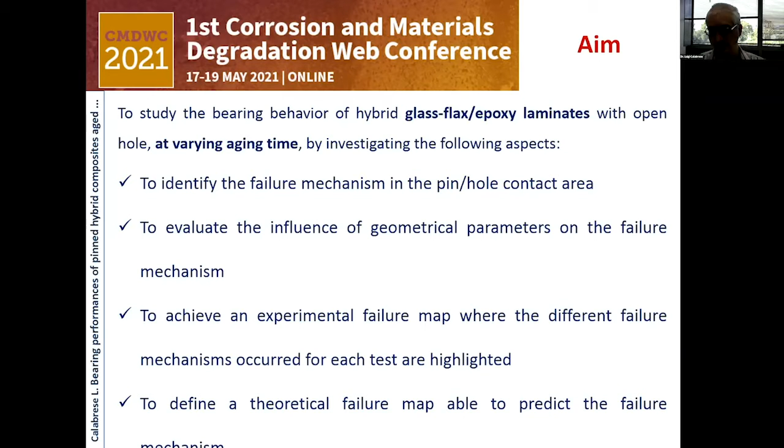Why this idea? We know that composite joints are characterized by different failure mechanisms: a net tension fracture when cracks start and propagate orthogonally to the load direction; a shear-out fracture when we have a fracture of the joint near the edge of the samples; a hybrid fracture, like cleavage, that involves net tension and shear-out mechanisms; and the usual bearing fracture where we have the collapse of the composite material just behind the pinned joint. For all of these, the failure mechanism is influenced by the geometry of the samples.

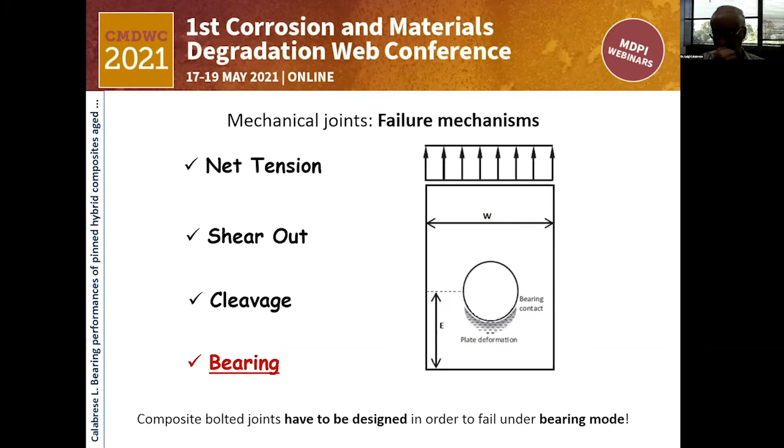For the joint design, an important parameter is to reach the bearing mode, which is the non-catastrophic failure mechanism. In the meanwhile, a new direction in composite materials is to use natural fibers to obtain sustainable composites.

From this point of view, the research literature is really structured, with a large amount of papers using several types of natural fibers. Here is reported, as reference, a short summary.

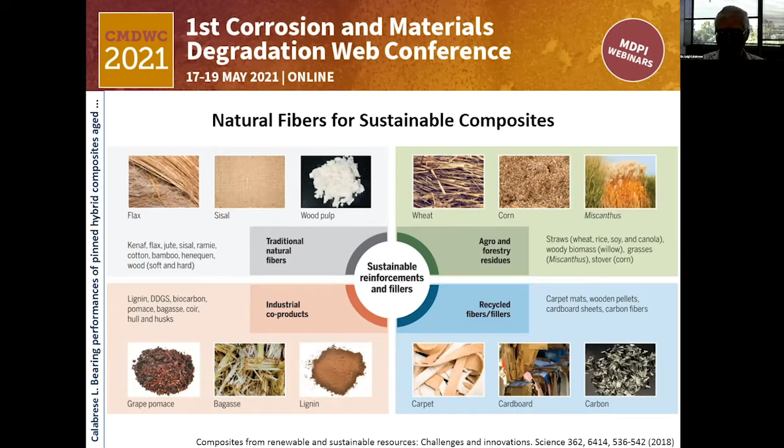But the main question is whether natural fibers can be considered suitable or sustainable as reinforcement. From the price point of view and the weight point of view, we clearly have some advantage to use them, with an evident reduction in price and weight. But at the same time, we know we have a reduction in performance, and also some issues related to the fact that the performance of the fibers is also influenced by the site where the plant grows.

The second aspect is durability — natural fibers suffer under critical environmental conditions. An important point of discussion is to evaluate the stability of these composites over time in this environment.

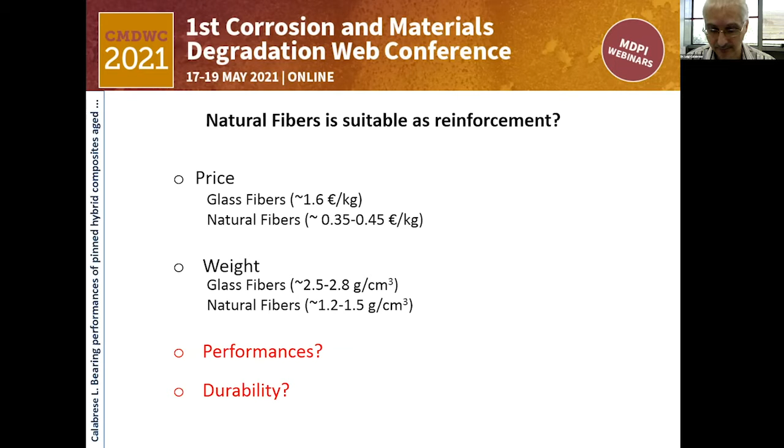Based on this concept, what is our approach? Our approach is to start by investigating a pinned joint, a classical joint. We realized different composites with varying stacking sequence — in particular, in this experience, flax, glass, and hybrid glass-flax composites.

We performed the test according to standard D5961. For the experimental campaign, we changed the diameter of the hole and also its position in the sample, to change the ratio of W and E to D, the width of the sample.

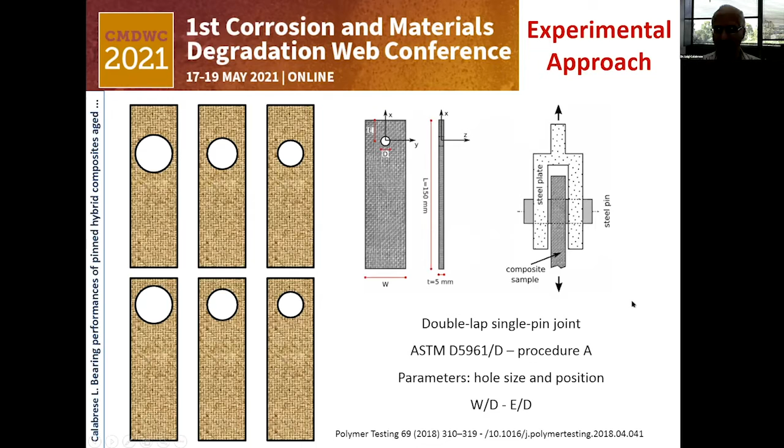The same experimental campaign was performed at increasing aging times, up to 60 days in a salt fog chamber.

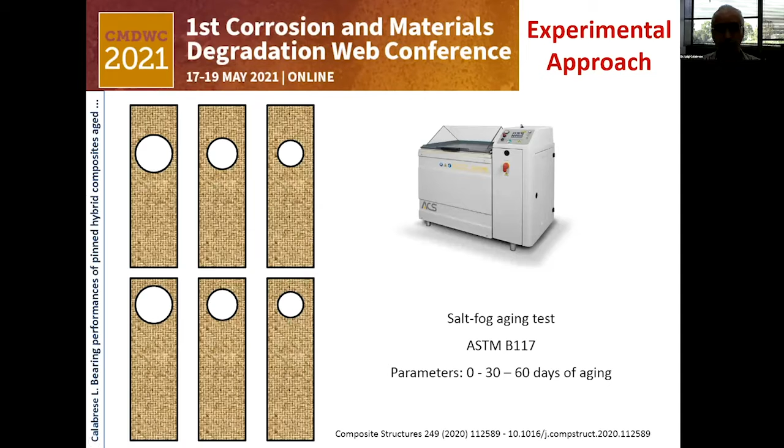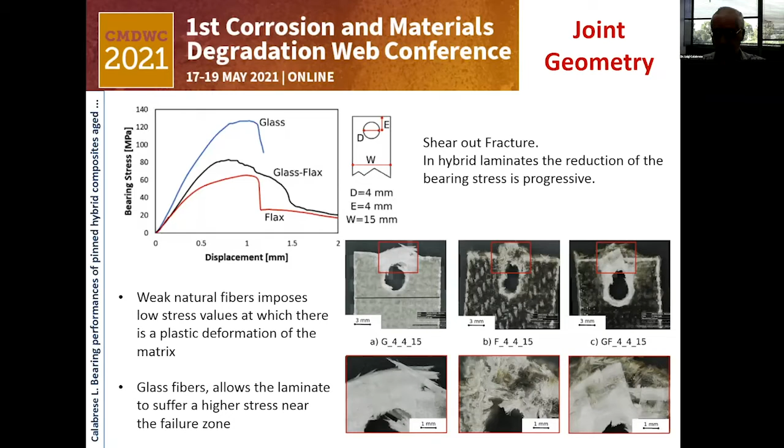In this case, considering that the edge distance is very low, the main failure mechanism is shear-out fracture, therefore a premature fracture. We see that the stacking sequence has a large influence on the mechanical behavior of the joint, because there is a competition between weak natural fibers and stiff, strong glass fibers, the synthetic one, with the hybrid composite showing intermediate behavior with a non-catastrophic fracture compared to the two previous ones.

Now, considering large edge distance but also large diameter, we have still another mechanical behavior. In this case, the net tension fracture is a premature fracture where the tensile properties of the fibers play a relevant role. In fact, the stacking sequence influences significantly the maximum stress, with obviously higher behavior for glass, and intermediate performance with the glass-flax.

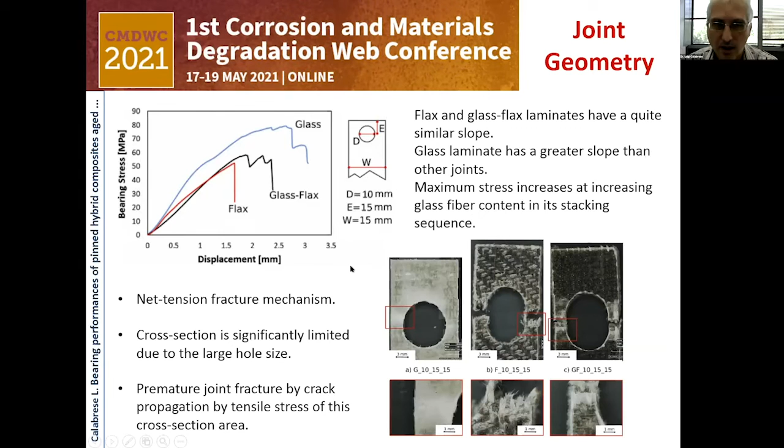Now, at this point, it was proposed an approach to identify how the joint geometry influences the failure mechanism. Here I summarized some results where we see that changing the edge distance and the diameters of the hole, we have different failure mechanisms. It's important to see that the net tension fracture was observed mainly for hybrid or natural flax composite laminates. The reason is that for this type of fracture, the stacking sequence has a relevant role in the mechanical performance of the joint.

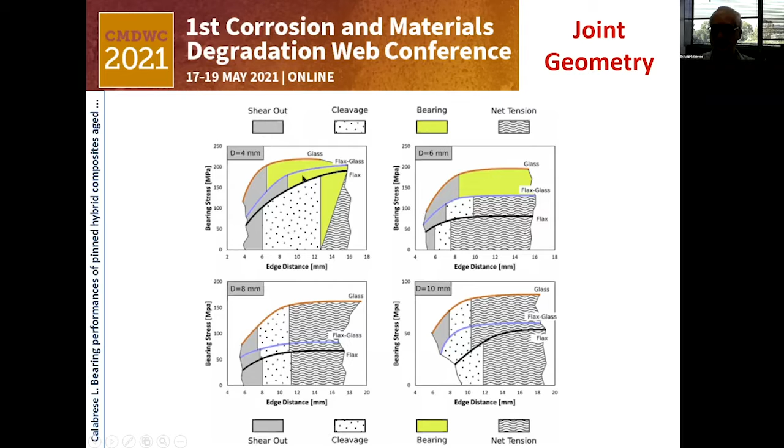In the meanwhile, also in shear out and cleavage fracture, we have a relationship between stacking sequence of the composites and performance. But after that, we also addressed another aspect, because previously we evidenced how the failure mechanism and the mechanical performance change at varying joint geometry. In this image, where we related the ratios WD and ED, we indicated the different failure mechanisms that we observed in the map. These samples were all realized in an unaged condition, and we see that depending on the joint geometry, the failure mechanisms are clustered in groups.

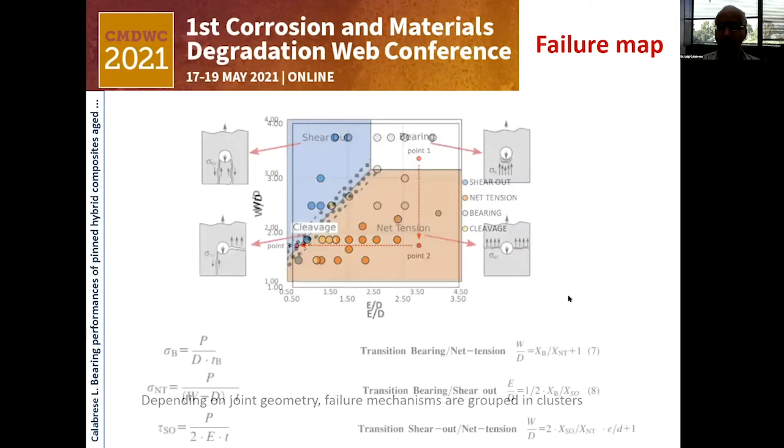At this point, our idea is to propose a simplified model that discriminates these clusters. Our approach is based on the typical simplified formula for bearing stress, net tension stress, and shear out stress. Considering that a mechanism for bearing occurs when the load observed in this formula is lower than the other, we identify the transition between, for example, bearing and net tension, considering that when the load in bearing equals the load in net tension, this can be considered as a threshold value that discriminates a bearing to net tension fracture.

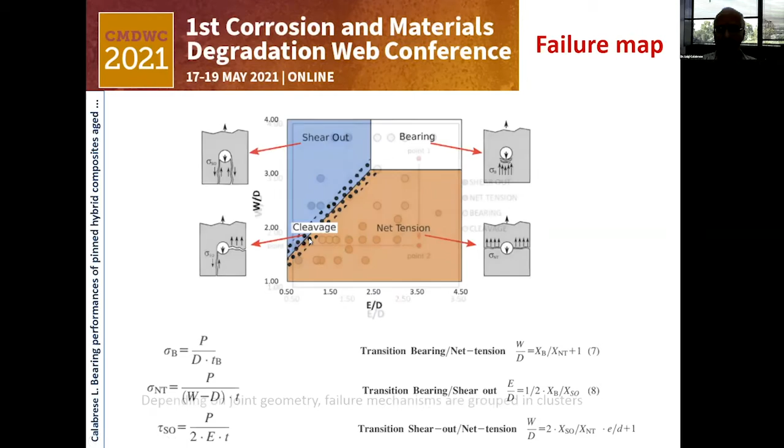We obtained these three formulas, and we see that this one is a horizontal line in this plot. The bearing to shear out instead is a vertical line, and the transition from shear out to net tension is an inclined straight line, with a slope reported here, in agreement with the experimental evidence that we show.

Here we summarized the failure maps that we observed experimentally for the different configurations. The flax composite is characterized by the smaller area for bearing. Instead, for glass, we have the larger area for bearing, therefore it's the most stable configuration. By using this map, it's possible to identify the bearing fracture for the glass-flax laminate for two specific values of ED and WD ratios.

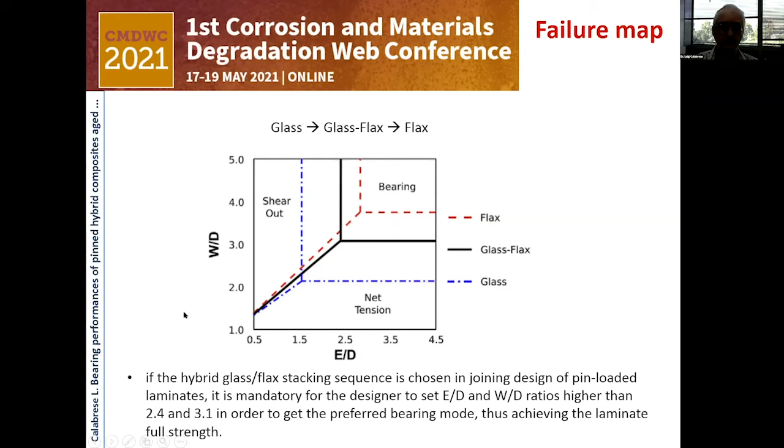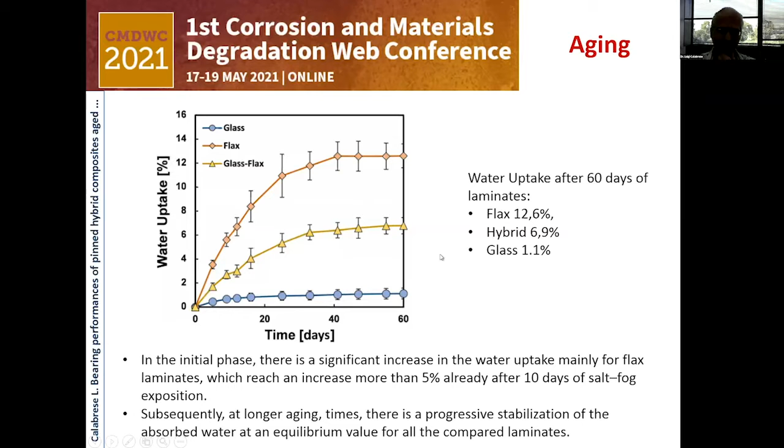From the mechanical point of view, we see that effectively we have a progressive reduction of the mechanical performance, the maximum stress decreases due to the aging, but also coupled to this reduction we have a transition, for example, from bearing mechanism to a mixed bearing net tension fracture. And also the displacement increases, indicating that we have a progressive softening behavior that increases the flexibility or plasticity of the composite.

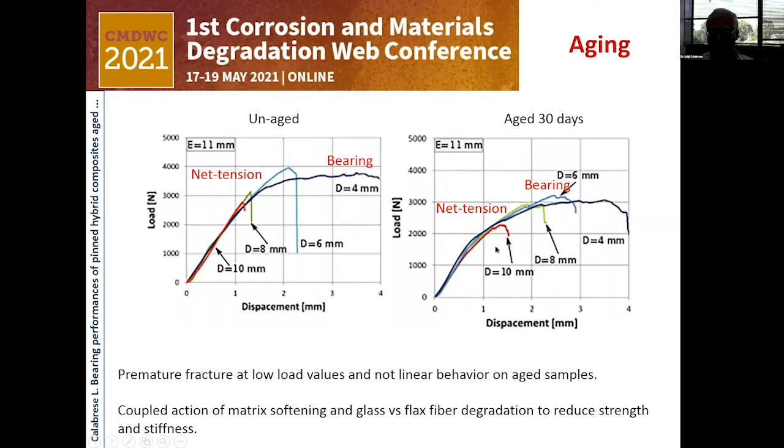This behavior was observed roughly changing the joint geometry. In this case, I won't go into detail to reduce the presentation. This is a new map where we tried to summarize how the aging effect influences the mechanical performance, the failure maps, and the failure mechanisms. We compared the maximum load and the displacement at the maximum load in order to understand how much the curve shifted from the left to the right side of this plot.

At the same time, we indicate this one, the unaged sample, and this one as the samples progressively aged at 30 and 60 days in the salt fog chamber. We see that the marker increases in dimension, increasing the geometry related to the edge, the distance of the geometry. Now we have that...

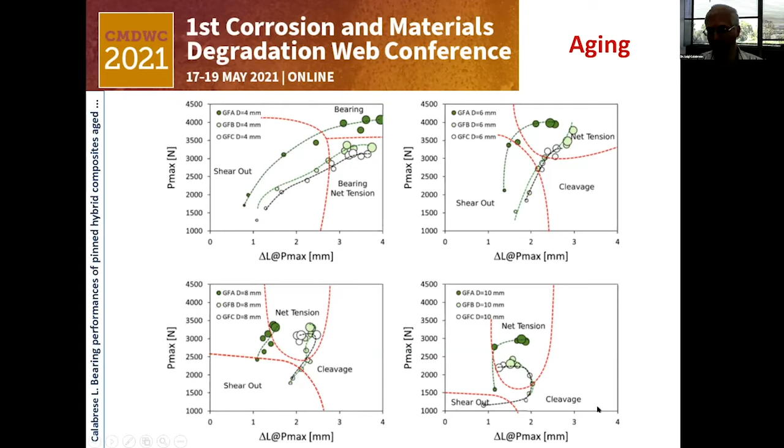And instead, for large diameter, the premature fracture due to net tension switches the behavior of the composite, like in the bearing configuration, with mainly a reduction of the load, but without a significant shift toward higher displacement.

Then we should talk about the behavior, but at this point, also due to aging, we observe this typical trend. But at this point, we tried to identify the failure mechanism and to relate this failure mechanism to the aging. What is the approach that we used?

In particular, we started from our typical formula. These are the same formulas that I showed before, but now they are explicitated to the load. We see that the maximum load, our hypothesis, is observed when we have the minimum from one of these formulas.

But at the same time, we also added the cleavage contribution shown here, that previously I did not indicate. In particular, I considered the cleavage fracture as a mixed contribution of net tension and shear out. Therefore, I determined the average value, and then I considered a coupling index that experimentally was evidenced as 0.83.

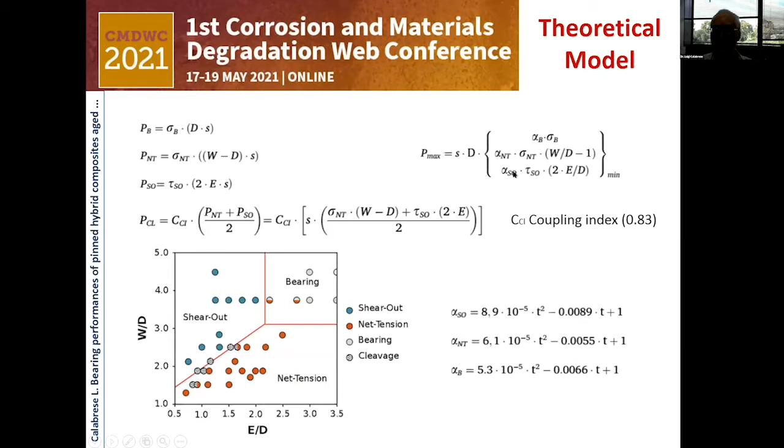At this point, we identified the load at the minimum to observe the failure mechanism, and we were able to determine the line that identifies not only the failure mechanism, but also the maximum load.

This compares the experimental data, the markers reported here, with the theoretical one, the dotted line. Effectively, we see a good relationship between the two models on the load, but mainly also in the failure mechanisms, with an error in the range of 5 to 8%.

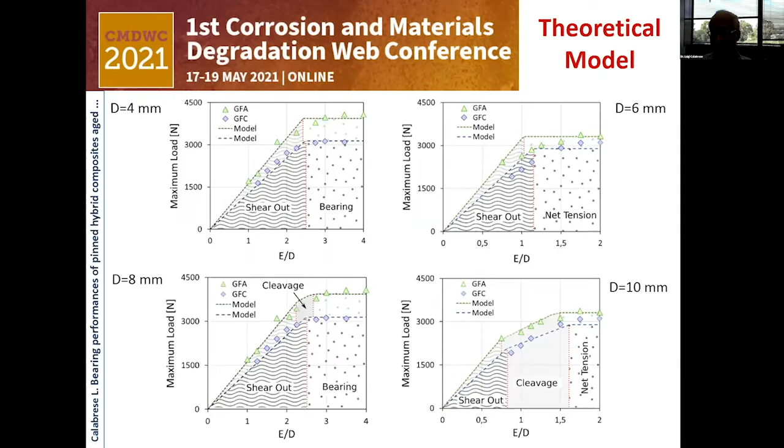Here I show the failure map in 3D of aged samples after 60 days, with the markers being the experimental data, and this being the model obtained by using this formula.

And therefore, we validated that the system is suitable to discriminate the failure mechanisms and the maximum load of the joint at varying joint geometry.

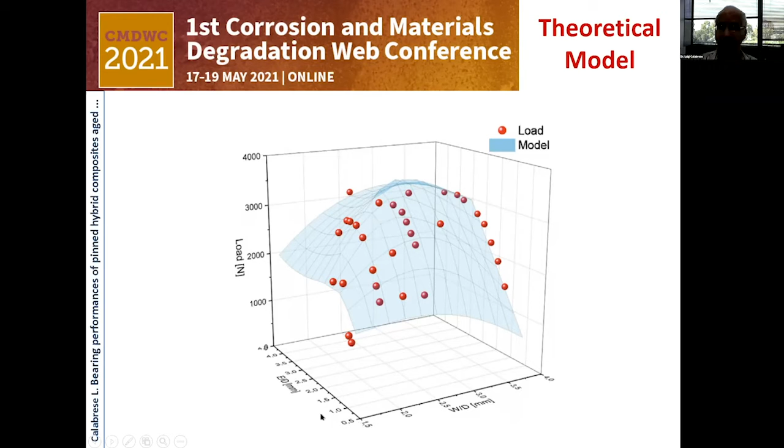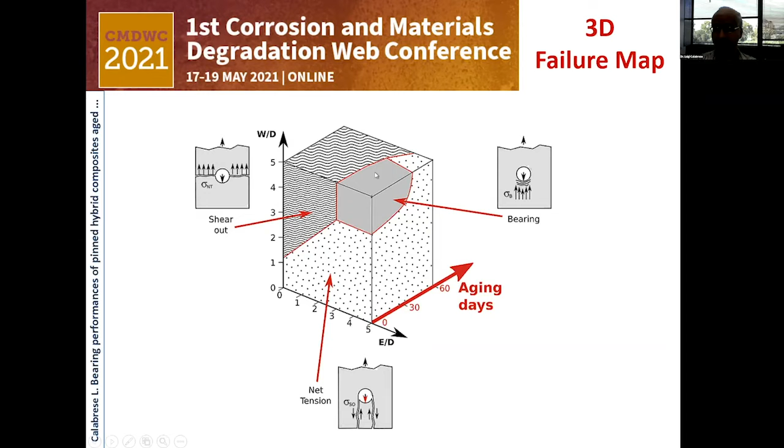The last step of this activity is an idea that by performing tests at increasing aging time and considering in which way the failure mechanism changes, it is possible to realize a three-dimensional failure map that can be used to identify where a specific failure mechanism is stable, for example the progressive bearing one.

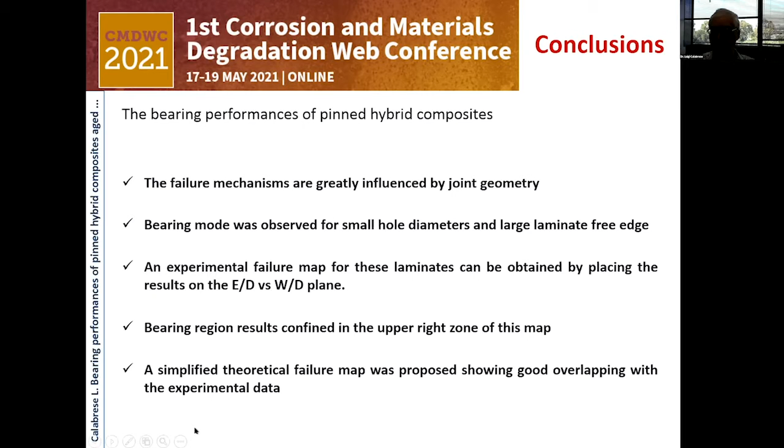At this point, summarizing, we can divide the conclusion into two sections. A first section related to the unaged configuration, where it's possible to evidence that this approach can be used to evaluate in which way the sample geometry, in particular in this experience the E/D, the edge distance to diameter, and the width to hole diameter ratio, influence the failure mechanism, and also to propose a simplified approach to forecast this failure mechanism, supporting the joint designer to identify the threshold value of the joint geometry to obtain progressive fracture of the joint.

In the meanwhile, the ageing contribution plays a relevant role in the degradation of the joint, and this degradation influences the complex failure mechanism that occurs in the pinned samples. In this case, the theoretical approach that we applied required the addition of an additional parameter related to the degradation index, which required support from experimental data.

But anyway, adapting this approach to the ageing information, it is possible to have a theoretical model with reliable performance.

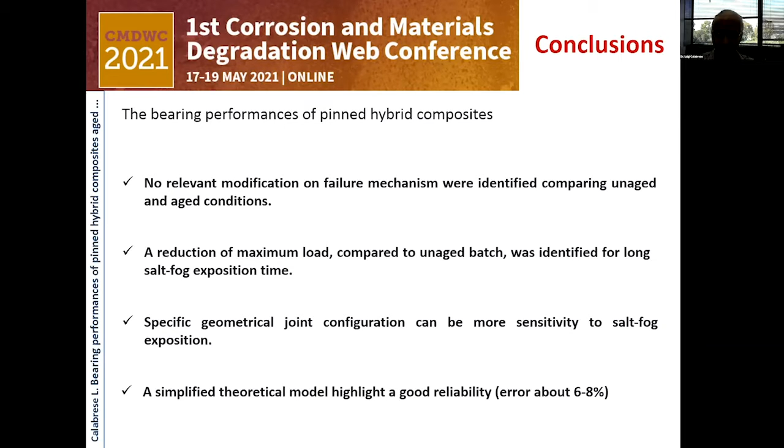Luigi, because you are the chair of the stream, let me take the lead. If there are no questions, I have one, Luigi. It's a corrosion conference, so is there any environmental effect in the story that you presented?

Now, of course, the degradation aspect of the composite material is a critical point. This is part of our activity that we are working on in Messina together with other partners. Our feeling is that specifically for composite materials, the degradation of the constituents, matrix and fibers, is the critical point, and in which way this failure mechanism occurs. And this is one aspect.

In the literature, we saw something about using coupling agents to reduce the diffusion of water at the interface. And this is our idea.

But at the moment, we are thinking that the degradation mechanism should be split into two groups: reversible and not reversible. Our idea is to give a further improvement on this approach, trying to discriminate how much of this degradation mechanism is critical effectively for our composite material. Because, for example, if we age one sample only for one day, we absorb water easily for a flax laminate, but it's reversible because it's only superficial water.

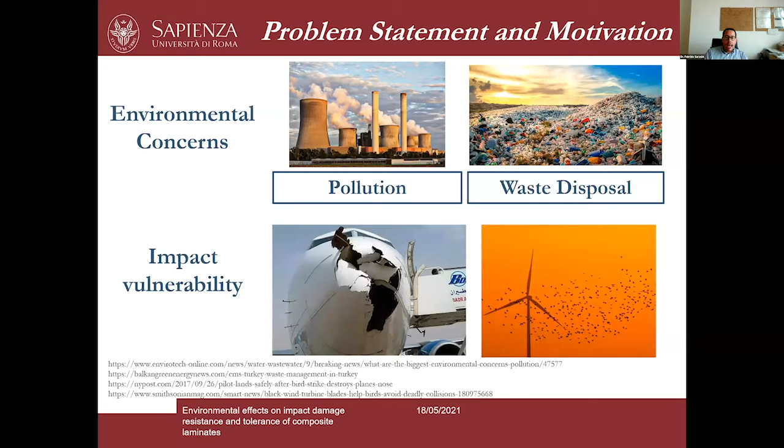Impact, if we want to give a formal definition, can be defined as the relatively sudden application of an impulsive force to a limited volume of material. The problem with this definition is that these two words, relatively and limited, can be subject to a wide range of interpretations. But in this presentation, I will be referring to low velocity impacts as those impacts which occur with a speed lower than 10 meters per second.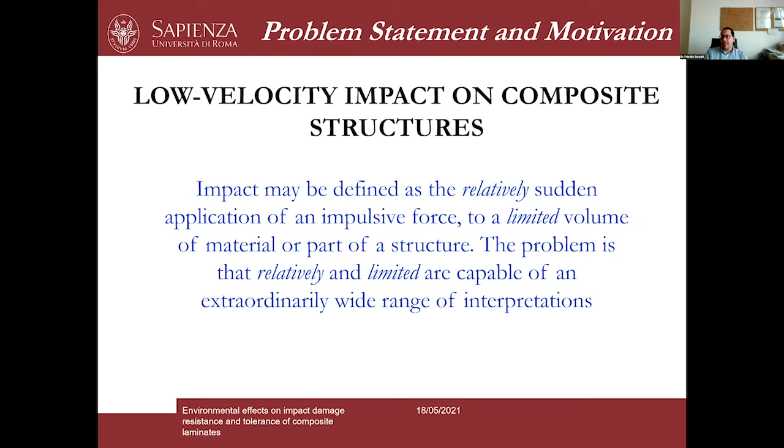So the next step is to understand why a low velocity impact can be a serious threat to composite materials. First, because these kinds of events can occur in the everyday life of a composite material, during manufacturing, during maintenance, during operation. The biggest difference compared to metal structures is that metal structures can usually absorb a large amount of energy by plastic deformation, but when we deal with composite materials, there is no plastic deformation, or at least it is very, very limited compared to metals.

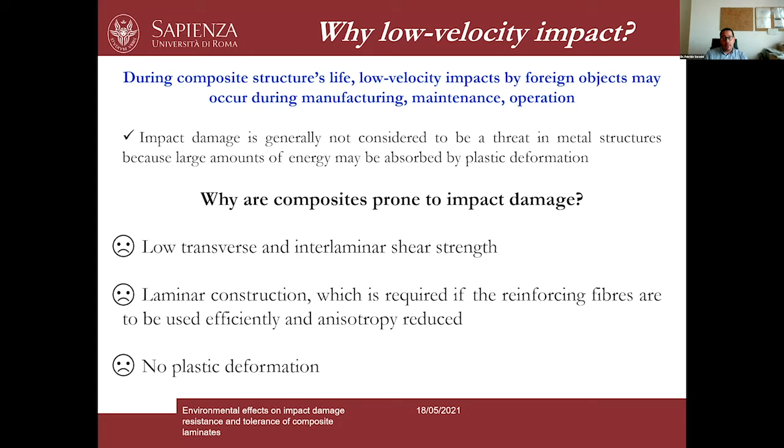In addition to this, composite materials usually show a pretty low transverse and interlaminar shear strength, and another problem is related to their laminar construction. If we put together all these issues, we can easily understand why composites are so prone to impact damage.

The brittle nature, the brittle failure mechanism of a composite material, together with its heterogeneous and non-isotropic nature, give rise to four major modes of failure under an impact event: matrix mode, delamination mode produced by interlaminar stresses, fiber mode, or penetration, when we get the final perforation of the specimen. These different damage modes can be operative at the same time in a composite material, so the resulting damage scenario can be pretty complex.

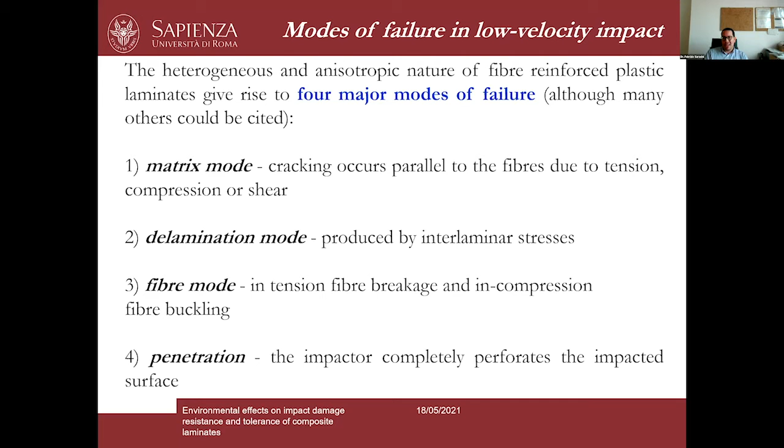Here you can see a schematic view summarizing the typical damage found in composite materials, where we have bending cracks and shear cracks, and these cracks usually trigger the nucleation and development of extensive delaminations. The problem with these delaminations is that they can severely reduce the strength of a composite material.

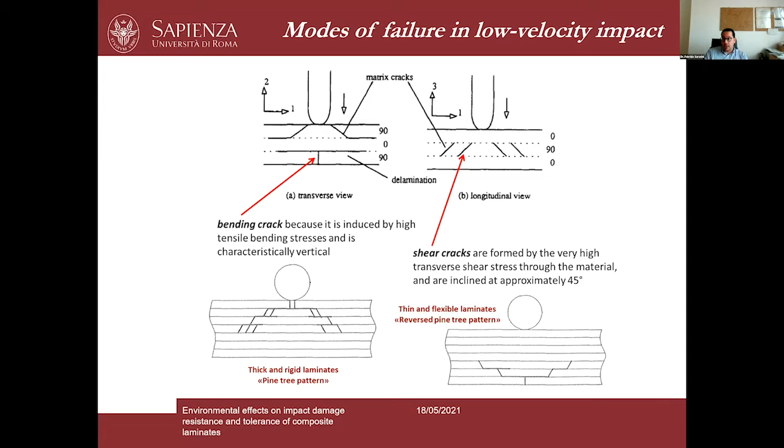But at the same time, they can go easily undetected by visual inspection, because many times they are located inside the specimen. So on the surface you cannot see anything, but instead you have significant damage inside, and the post-impact residual strength of the composite laminate is usually significantly reduced.

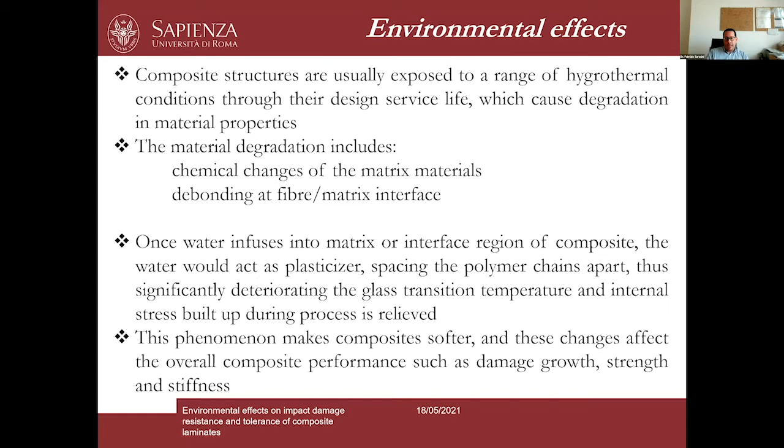In addition to the impact damage and the vulnerability of composite materials, we have to mention that these composite structures, during their service life, are usually exposed to a wide range of hygrothermal conditions. These conditions can cause chemical changes in the matrix material and can destroy the fiber-matrix interfacial adhesion. It is expected that these effects can completely change the mechanical response of composite materials, not only the quasi-static performance but also the dynamic response.

There are a lot of studies dealing with the effects of low velocity impact on composite materials, or studies dealing with environmental aging on composite materials. However, the need to correlate aging effects with the impact resistance of a composite material has received limited attention in literature, despite some existing studies.

Here, for example, you can see the typical water absorption curve of a standard conventional composite material based on carbon fibers embedded in an epoxy matrix. These composites were subjected to water absorption at 71 Celsius degrees for a pretty long time, over 400 days. Here you can see the typical water absorption curve.

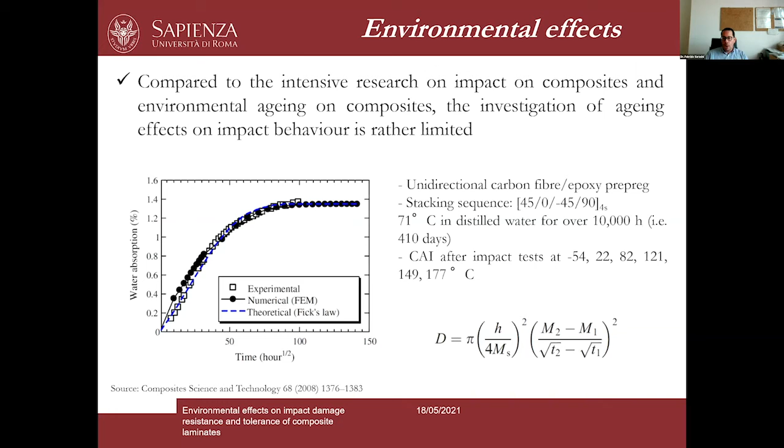We have to mention first that composites usually follow Fickian behavior under water absorption, and here you can clearly see these results. But one point to note is that for conventional synthetic composite materials, the level of absorbed water is usually pretty low, around 1.2 to 1.4 percent.

The problem is that despite this very low water absorption, here you can see the impact response curves for dry and wet specimens, and there is an effect on the impact response curves. In this specific case, the threshold load of the wet specimen was significantly reduced compared to the dry specimen.

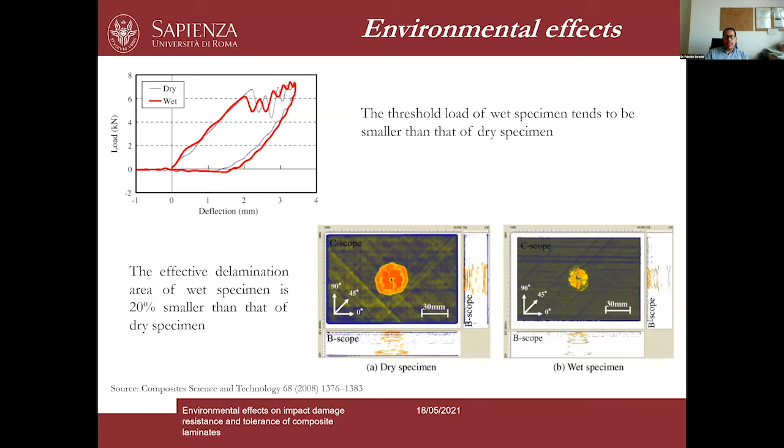A much more important issue is the extension of the delaminated area. Here you see a comparison of the delaminated area obtained by ultrasonic C-scans, and you can see that the delaminated area for the wet specimen was smaller than for the dry specimen. This is related to the fact that the composite material became much more compliant, toughened and softened by water absorption.

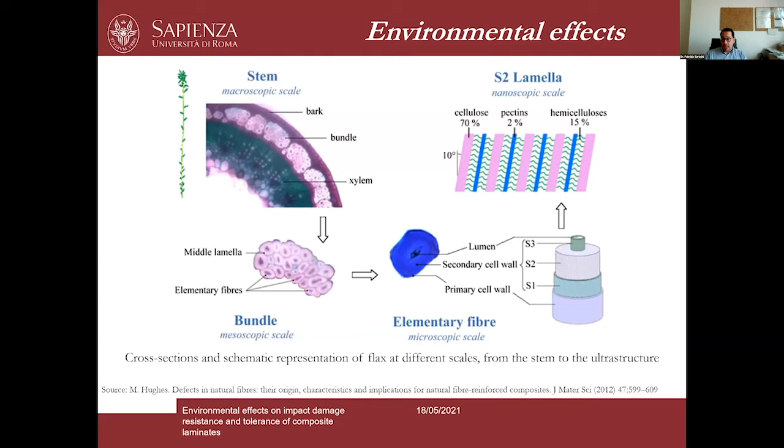Firstly, because natural fibers show some peculiarities in their microstructure and mechanical properties. Here you can see a very nice sketch of the structure of flax fibers. As you can see, these natural fibers usually show a hierarchical structure that spans from the macroscopic up to the nanoscopic scale. So we can consider a natural fiber as a composite itself. It's pretty complex, its behavior.

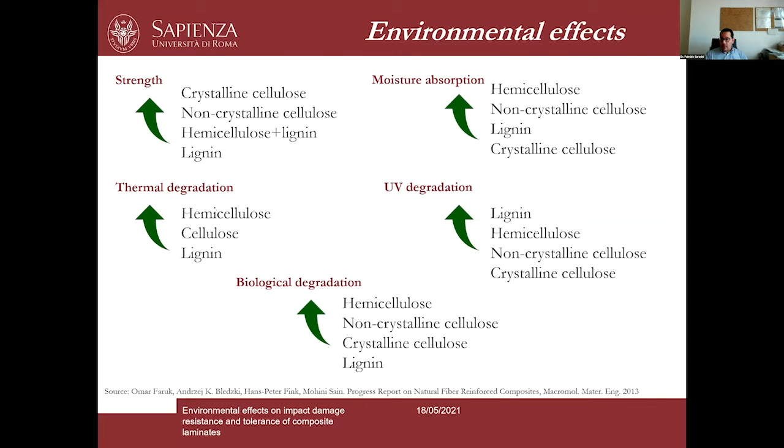In addition to this hierarchical structure, natural fibers also show properties which are highly dependent on the chemical constituents, and in particular on the relative proportion of the chemical constituents. Basically, natural fibers are composed of hemicellulose, lignin, and cellulose—the three main chemical constituents of a natural fiber. Here in this picture, you can see how these different chemical constituents can affect not only the mechanical properties, in this specific case the strength, but also the degradation properties of these fibers, in terms of moisture absorption, UV degradation, thermal degradation, and biological degradation. So this is another issue that we need to consider.

As Luigi mentioned in his presentation, there is also a very strong effect of moisture on natural fibers. This is something that is not observed with conventional fibers—carbon fibers, glass fibers, do not tend to absorb water. But this is not true for natural fibers. Natural fibers are mostly hydrophilic, and what happens is that they tend to absorb a large amount of water.

When they absorb water, they tend to undergo swelling. This swelling creates matrix microcracks around the swollen fiber, and these microcracks can actually make capillary action much easier. So we have much water which is actually attracted to the fiber itself. When this water actually reaches the fiber matrix interface, the fiber is pretty rich with constituents which can be easily solubilized by water. So we have a significant degradation of the fiber, and at the same time a significant degradation of the fiber matrix interface, which actually leads to ultimate fiber matrix debonding.

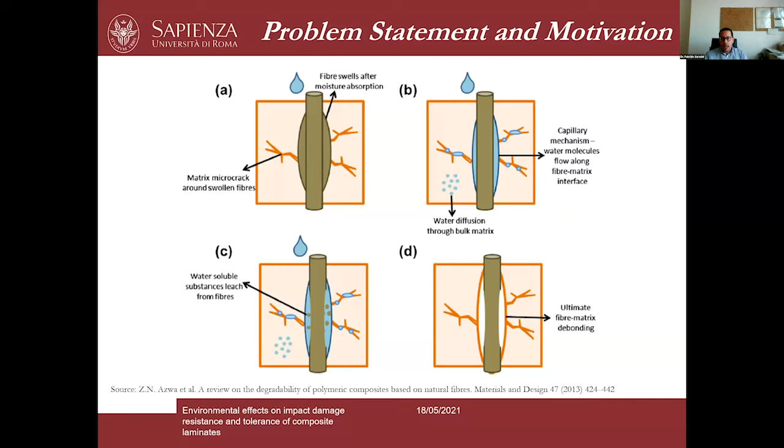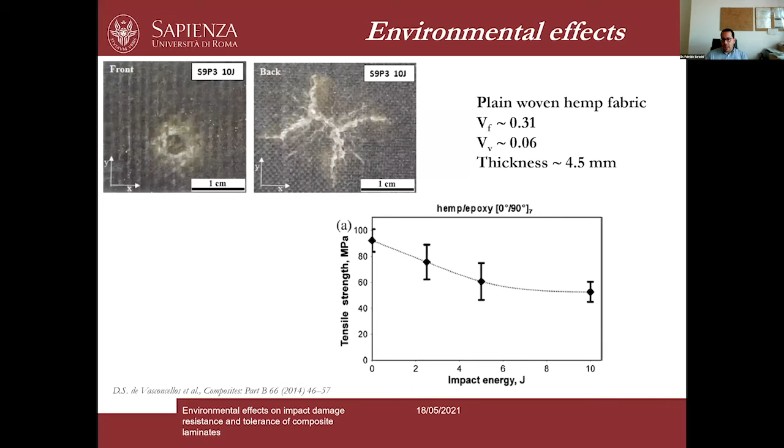So let's imagine what happens if we combine environmental aging with low velocity impact on a natural fiber composite. This is something that we have investigated. In this case, we considered jute fiber composites. In an attempt to reduce the effects of environmental aging, we tried to solve this issue by hybridization—basically hybridizing jute fibers with basalt fibers. Basalt fibers are natural fibers of mineral origin, but they show mechanical properties comparable to glass fibers, and they do not absorb a large amount of water compared to jute fibers.

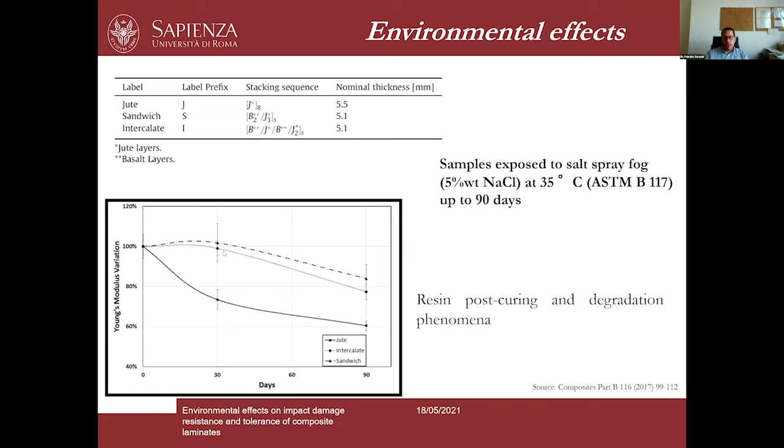These composite materials were realized in two different hybrid configurations, a sandwich configuration and an intercalated configuration—the difference being simply how we stacked the different layers together. This composite material was subjected to a salt spray fog test up to 90 days. We then analyzed the results from a quasi-static point of view, performing flexural and tensile tests, and also analyzing what happens when these composites are subjected to low velocity impact. Here you can see the effect of this aging on, for example, the Young's modulus. We can see a significant decrease for jute-based composite, and this decrease was somewhat reduced by the presence of mineral fibers such as basalt fibers.

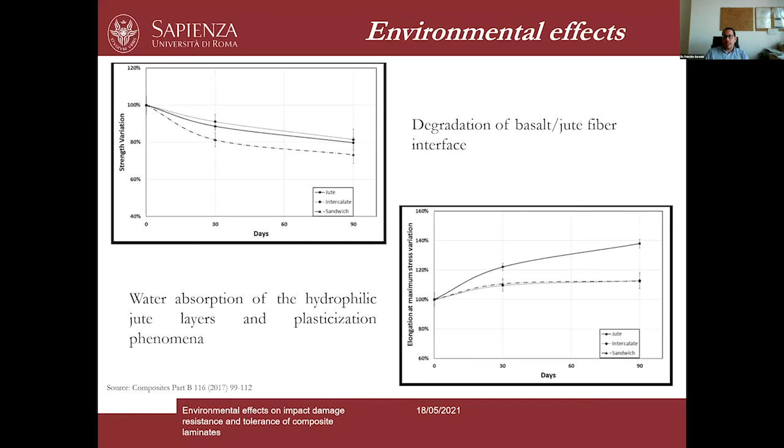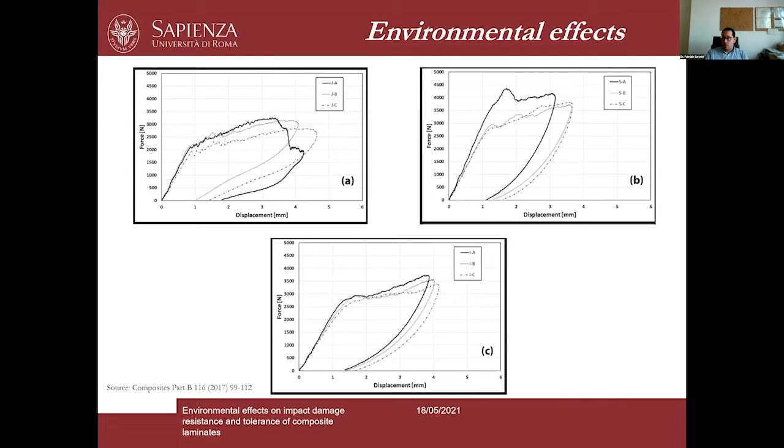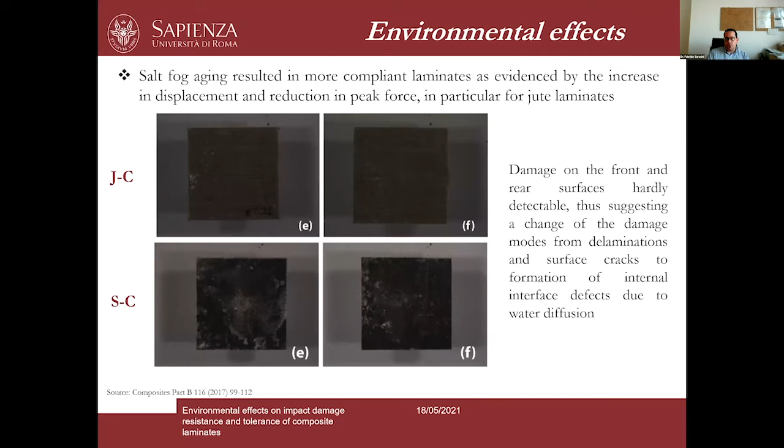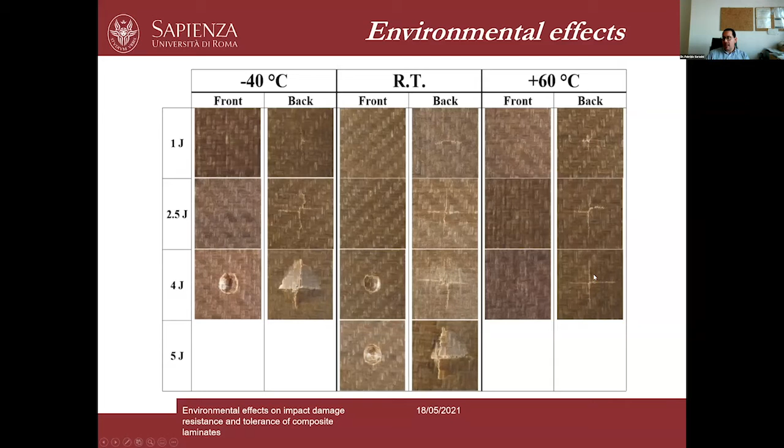There is, of course, a decrease in these properties with an increase in impact energy, and this is pretty standard. The problem is we didn't detect any clear trend with operating temperature. This is probably related to the fact, as we have seen, that these composite materials are characterized by a strong localization of the damage.

So basically, in these composite materials, the delaminations are really limited compared to standard and conventional composite materials. It is expected, due especially to this strong localization, that in the presence of the cross-shaped macro cracks, the temperature is not able to change the failure mode. That's why we didn't detect a significant effect of temperature on the residual properties. But the temperature did have a significant effect, for example, on the energy absorption ability of these composite materials.

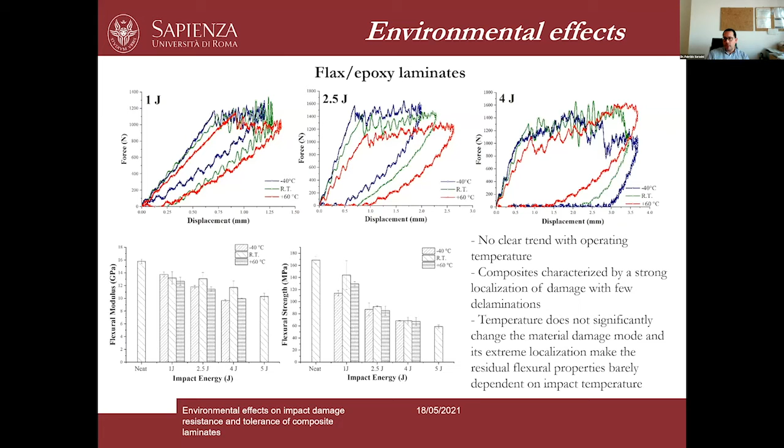These are all issues that, according to my point of view, need to be further investigated, because in literature there are few studies dealing with these issues. So to conclude, I can state that there is an increasing need for combining environmental issues and improved mechanical performances of composite laminates. This is true in different environments under different loading conditions, and impact for sure is one of the most important to address.

A viable solution to mitigate the environmental issues could be the use of natural fiber composites. But as we saw during this presentation, these composites show pretty particular behavior in terms of microstructure and mechanical properties. If we focus on the impact response of natural fiber composites, usually delamination is not envisaged as a detrimental, significant failure mode, as it happens in synthetic composite materials.

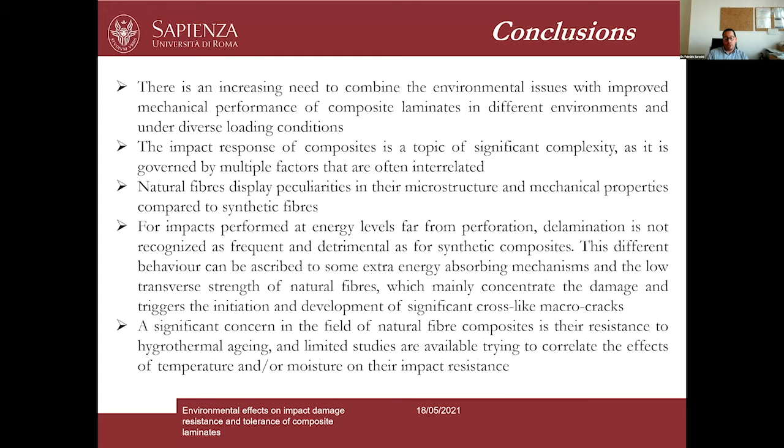This is mainly due to the fact that these natural fibers show a pretty low transverse strength that tends to localize the damage and triggers the development of significant macro cracks. So what we have to do in the future, if we want to broaden the application of these natural fiber composites, is to investigate the effect of environmental aging, in an attempt to correlate the effect of hygrothermal conditions on the impact resistance of these composite laminates. This is just to thank some colleagues and all of you for your attention.

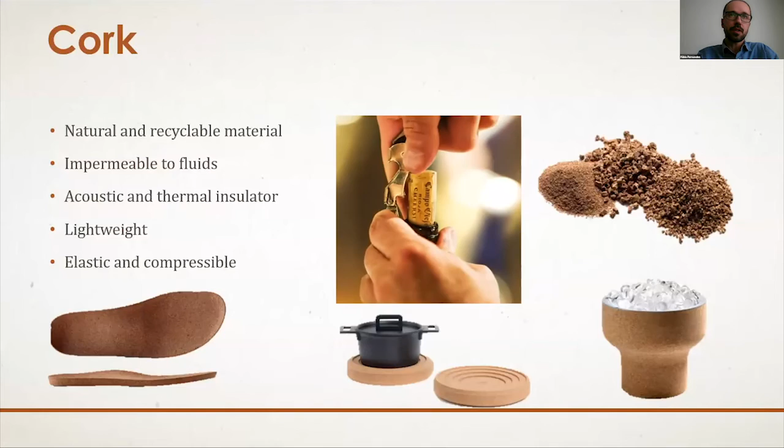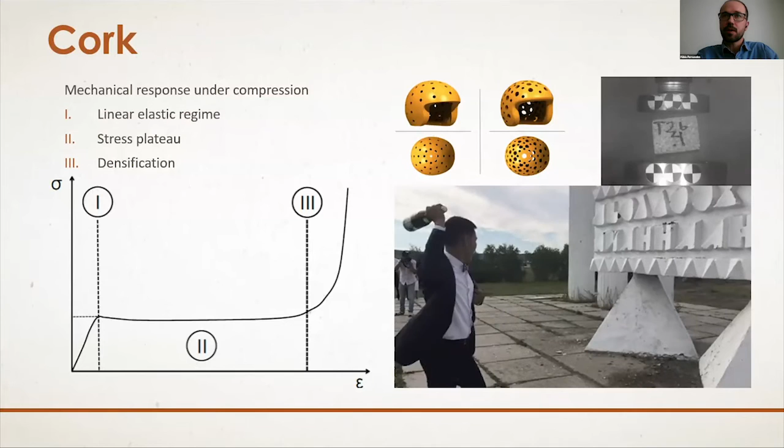Good quality cork is usually used in production of cork stoppers, something that has happened, I think, for about 2 millennia bottling wine. Cork with lower quality for stopper production and recycled cork are usually not wasted, so we can manufacture other composites for flooring, insulation, sealing, sporting goods, even some parts of shoes, among many others. Currently there are several applications for this material, mainly thanks to its properties and the development of new cork composites. In our group, thanks to the remarkable mechanical behavior of cork composites, we have been exploring their use in many applications, including structures under impact and protective gear.

So talking a little bit more about why cork has these mechanical properties or even these thermal properties, where it is good for thermal insulation.

It can be explained by its cellular microstructure and chemical composition of the cell walls. The prismatic closed microstructure of this material was first reported by Robert Hooke in the 17th century. The solid volume fraction corresponds to 15% of its total volume, which explains its low density. Cork cell walls usually have a thickness of 2 micrometers, and they are mainly composed of suberin in association with lignin and a lesser content of polysaccharides such as hemicellulose or cellulose.

Suberin is important in the properties of cork because it's a lipophilic biopolymer and is responsible for its elasticity and compressibility, its viscoelastic behavior and relaxation properties, as well as impermeability and resilience. Of course, the other constituents are also important; for instance, lignin gives structural stiffness to the cell walls.

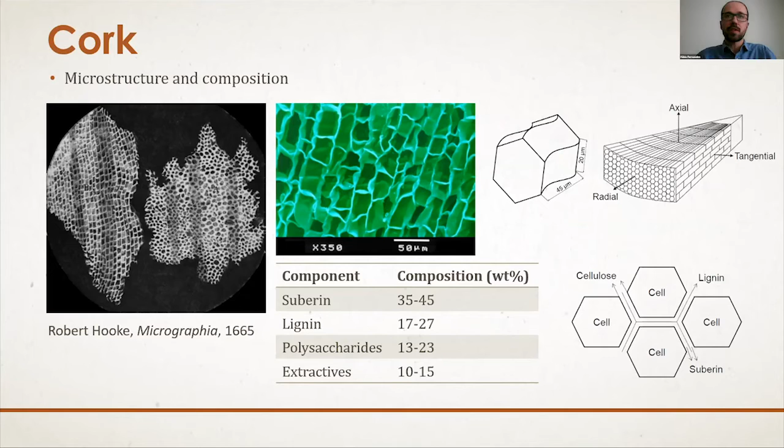Thanks to its mechanical and thermal properties, and also aesthetics and sustainability, cork composites have been used in outdoor applications, from sculptures to building facades, urban furniture, among many others, as well as other products exposed to the environment. So there is one question that needs to be answered: what happens to these composites and their properties when exposed in the long term to UV radiation?

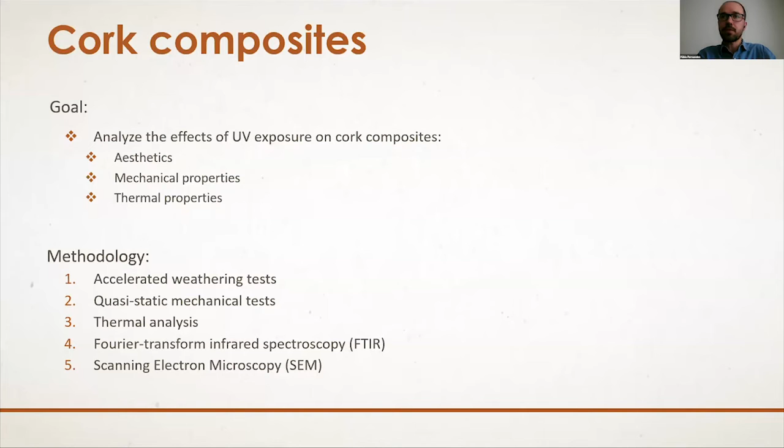The aim of this study was to analyze the effects of UV exposure on cork composites, specifically on 3 major points: the aesthetics in terms of visual aspect, the mechanical properties, and the thermal properties. The methodology consisted in submitting cork composites to accelerated weathering tests, focusing on UV, followed by mechanical testing, thermal testing, and FTIR and SEM analysis.

To assess the resistance to UV, a commercial cork composite was used. This one is manufactured by compression molding, using cork granules around 0.5 and 1 millimeter, and thermosetting polyurethane binder. This results in isotropic specimens with an average density of 200 kilograms per cubic meter. Due to the limited dimensions of the accelerated weathering chamber, we had to stick with 8 millimeter thick sheets for exposure to UV, so we have a limited thickness.

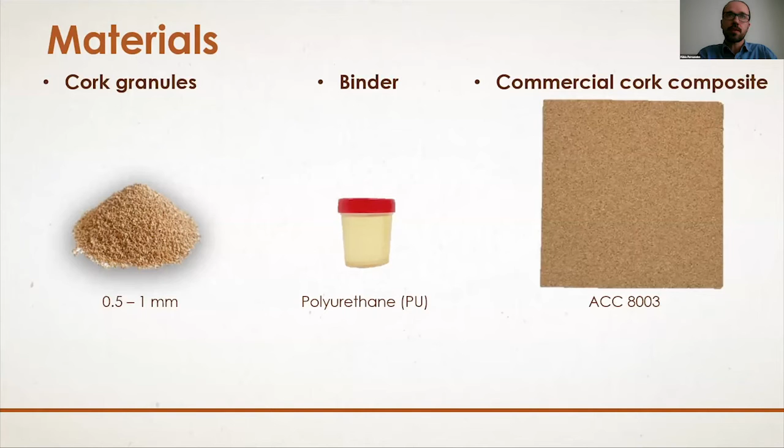First we submitted the samples to UV exposure in the QUV accelerated weathering tester to simulate the damaging effects of sunlight. UVA lamps with a wavelength of 340 nanometers were employed, corresponding to an irradiance of around 0.68 watts per square meter, equivalent to noon summer sunlight. This makes it possible to obtain quick results without sacrificing the correlation.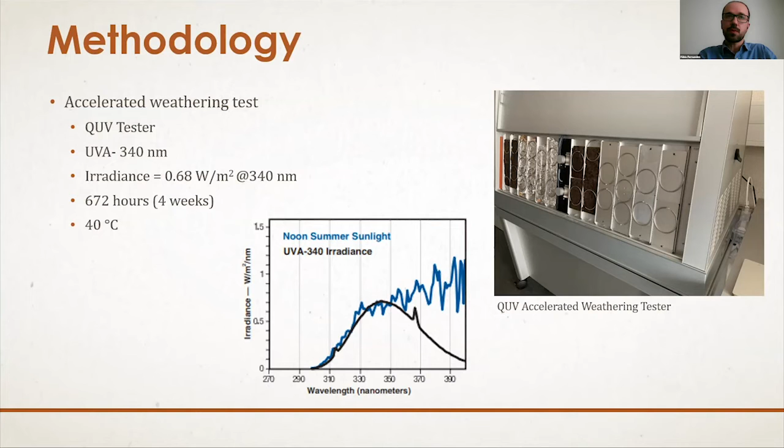The samples were exposed during 4 weeks, a total of 672 hours, at 40 degrees Celsius. These lamps were selected because they make it possible to realistically reproduce the damaging effects of sunlight that occur between 300 and 400 nanometers, which typically causes the most weathering damage to materials exposed outdoors.

After exposure to UV, samples were subjected to mechanical testing, thermal analysis, FTIR, and SEM analysis. The same sample size was adopted for all of these kinds of testing and analysis. In all the analyses, non-exposed samples were also tested as a reference for comparison and assessment of the changes caused by exposure to UV.

Uniaxial compression tests were carried out at quasi-static strain rates, a speed of 1 millimeter per minute, in order to analyze the changes in the stress-strain relation. Thermal analyses were also carried out in order to determine the thermal conductivity, thermal diffusivity, and the volumetric specific heat.

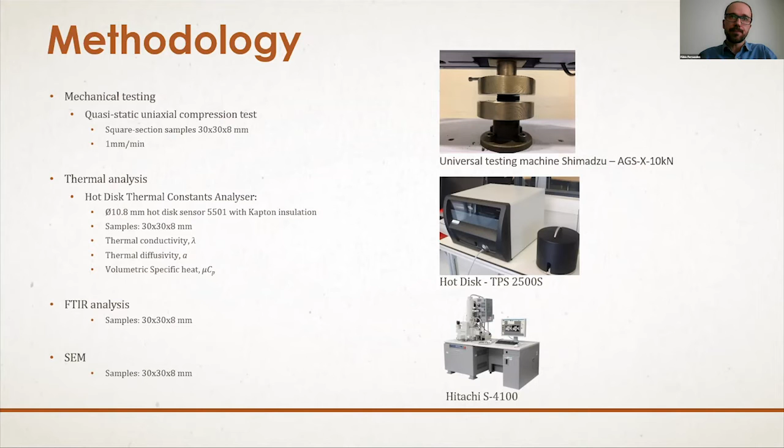Each analysis took 80 seconds at a power of 11 milliwatts. FTIR spectra was also acquired to assess possible changes in the characteristics of the samples, using an FTIR spectrometer equipped with an ATR accessory. The morphology of both types of samples was also assessed by SEM equipment.

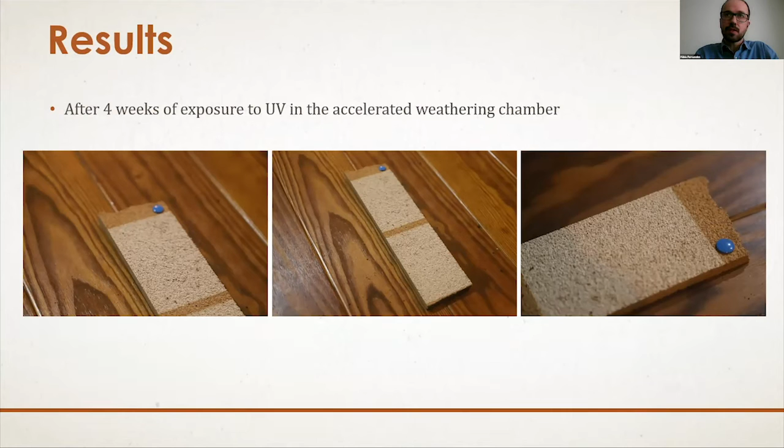In terms of results, one thing was immediately clear: the aesthetics of this composite were clearly affected by the UV radiation. We can see the discoloration between the exposed region and the non-exposed region. The degradation of the surface was evident at the macroscopic level thanks to this discoloration. In terms of color, this was more than evident.

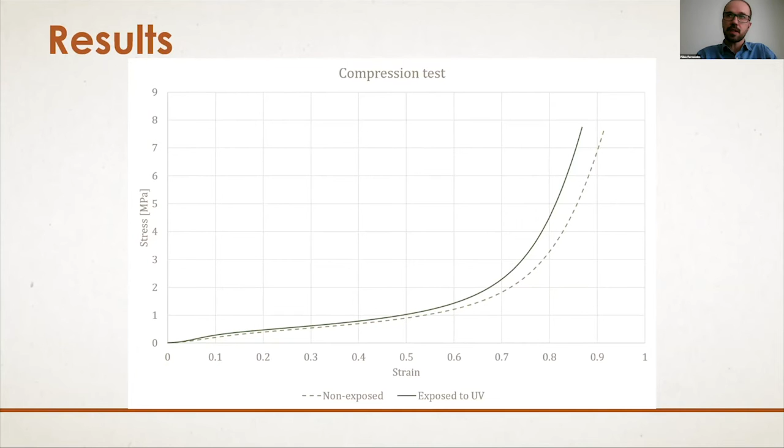Regarding the thermal analysis, focusing on the typical application of cork composites as a thermal insulator, we can confirm through its thermal conductivity, diffusivity, and volumetric specific heat that there is some degradation of its thermal constants. The conductivity and diffusivity of samples exposed to UV increased, while the volumetric specific heat decreased. Although this means the specimens exposed to UV have a lower capacity as a thermal insulator than the non-exposed ones, the variation is very small, and the degraded composite can continue to be used as a thermal insulator. So this was the main conclusion from the thermal analysis.

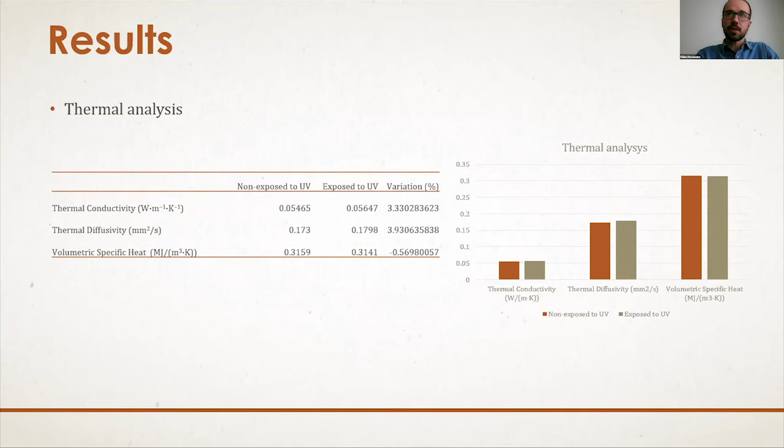So the main conclusion of this work is that ultraviolet radiation causes changes in the microstructure of cork, which reflect in its macroscopic properties. The changes are clear in terms of discoloration. Regarding mechanical properties, the compressive strength increased, although there is a clear loss in terms of viscoelasticity and compressibility related to the suberin content. Degradation of its capacity as an insulator was also observed, but the magnitude of this effect is almost insignificant, at least for the time of exposure employed in our experiments.

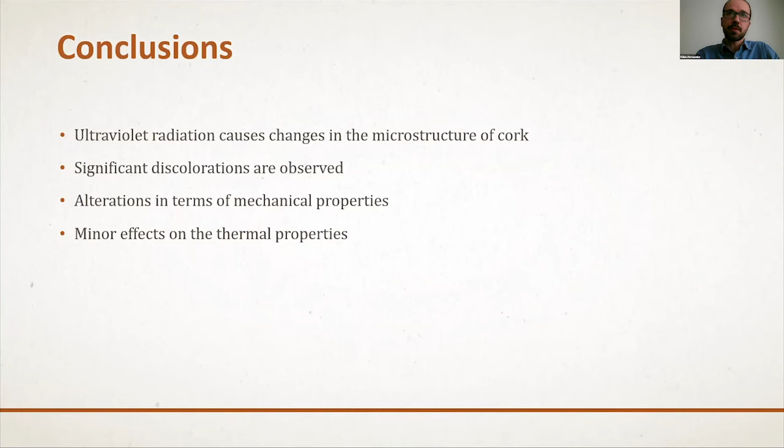Okay, thank you, Fabio, for the presentation. I have one question. Can you talk a little deeper about the degradation mechanisms of the cork material under ultraviolet conditions, and also summarize some applications, because I know you work, for example, with mortars or something like that in civil applications, since it could also be used in this field. Please add something on these aspects. Okay, thank you, Professor Calabrese.

These are nice questions. Regarding the mechanism of degradation of cork, what I can say is that basically it's all related to the microstructure and chemical composition of cork. What gives this special, non-linear elastic behavior, focusing on the mechanical behavior of cork, is its chemical composition, mainly the contents of suberin and also lignin. From these 4 weeks of exposure, and I must stress this was preliminary research, we saw that in fact suberin and lignin are affected. This was clear in the FTIR analysis, they are affected by UV.

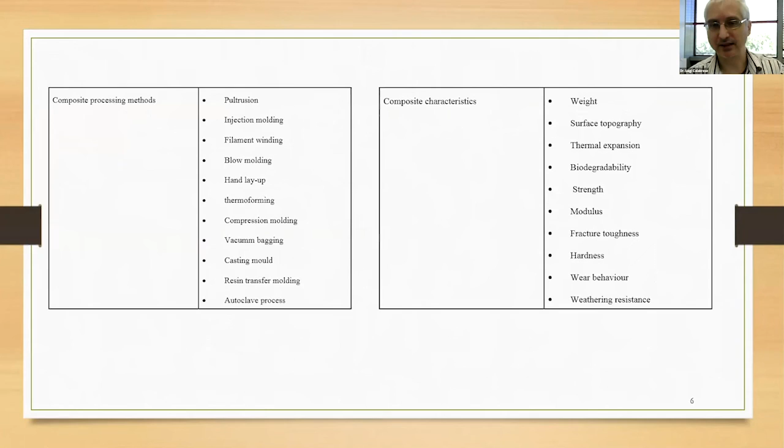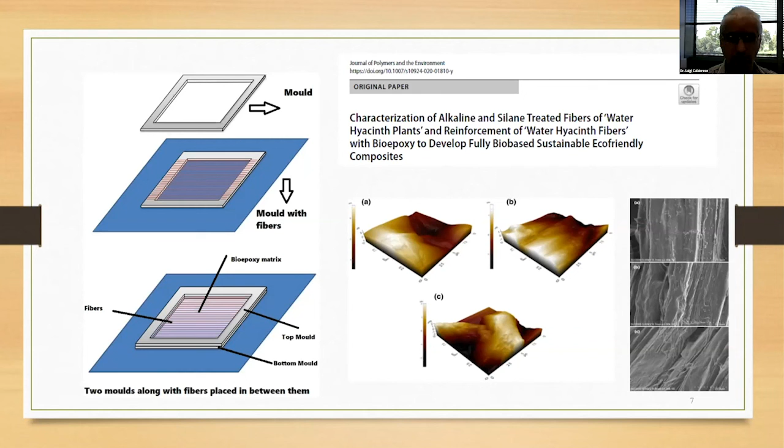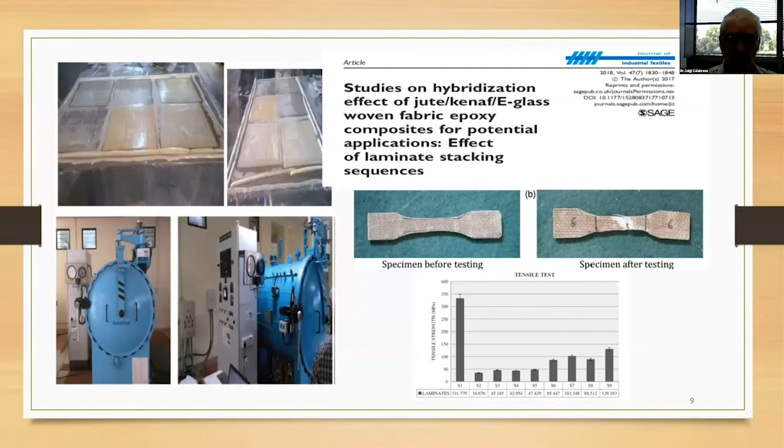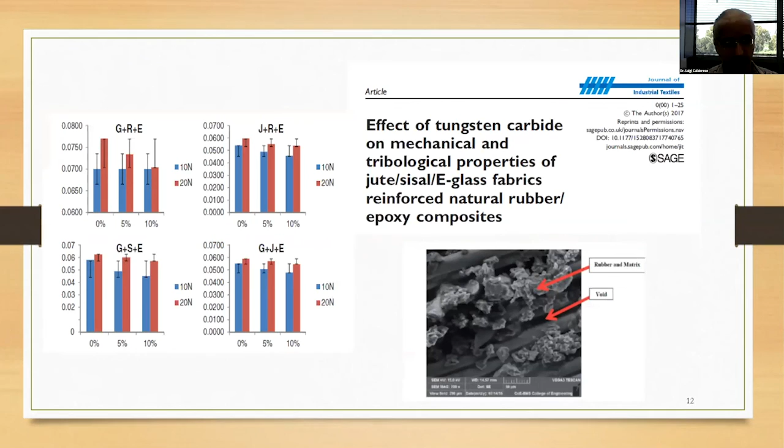He started, of course, roughly about natural fiber composites in the market and in the literature, and then he stressed his discussion on the durability performance of this class of composite materials, mainly focusing on his experience on the characterization of composites, relating on one side the properties of the constituents, and on the other side an important aspect, the technology used to produce the composites. In this case he used a compression molding approach or autoclave samples. Based on this experience, he concluded that natural fibers can be considered sustainable materials for composite structures, but have some issues related to performance and durability aspects.

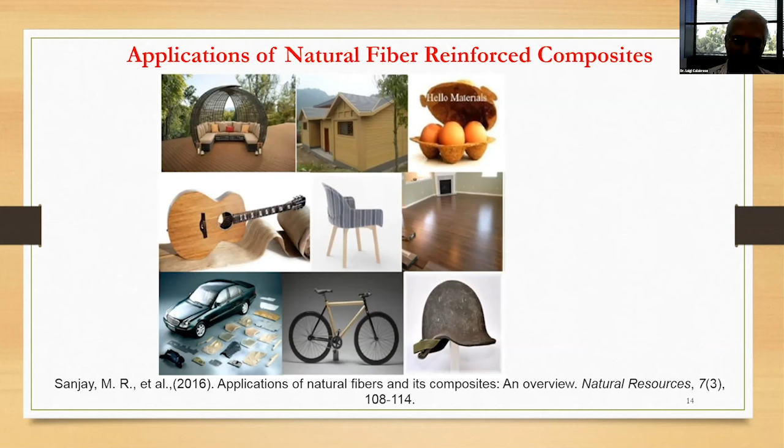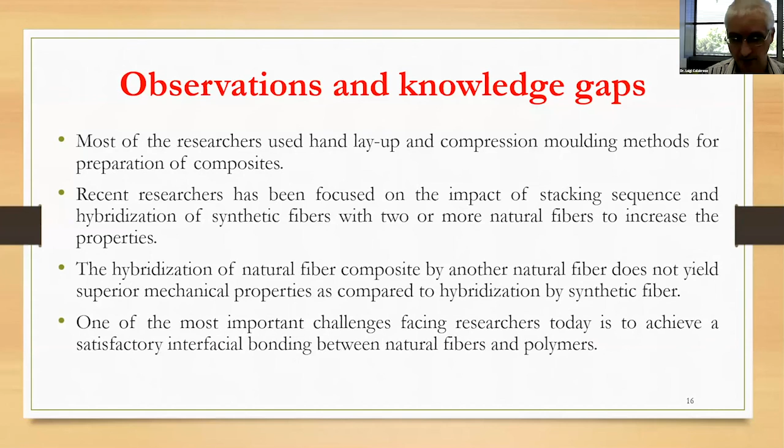For this reason, their final consideration was that to have a real industrial application, an important point of discussion is how to hybridize these materials with synthetic ones. This is in agreement with the other talk presented today, because only in this way is it possible to optimize the use of this class of materials, taking into account the relevant performance in terms of green, weight and price aspects, but also the limited durability performance.